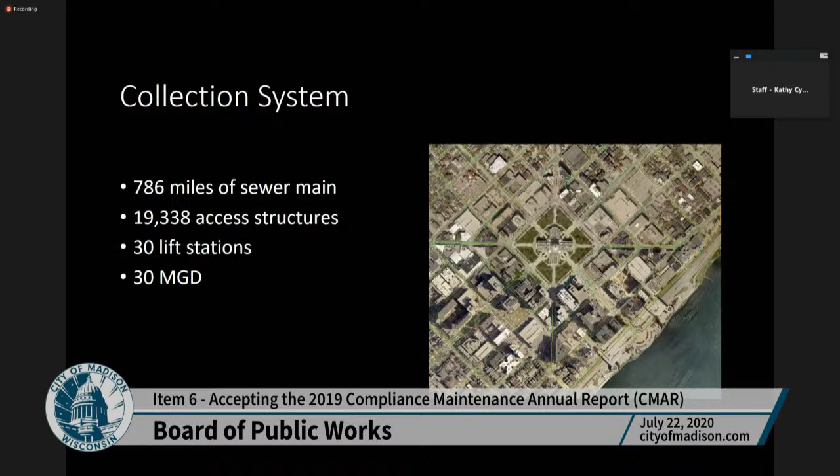The city's collection system consists of 786 miles of sanitary sewer main connected by over 19,000 access structures and 30 lift stations. Every day we convey 30 million gallons of wastewater to the Nine Springs wastewater treatment plant from our residents and businesses. A little bit about the makeup of the pipes in the system.

Sanitary sewer pipes have an estimated useful life of 100 years. You can see that 61% of our system is 50 years or younger, and only 2% of our system has exceeded its theoretical life. That's what we refer to as our infrastructure deficit.

The majority of the pipe at this point in time is plastic. This mirrors the age of the pipes. In 1983 and forward, most pipes were constructed of plastic materials, PVC, and in some cases HDPE. Prior to that, they were predominantly clay or vitrified clay pipe.

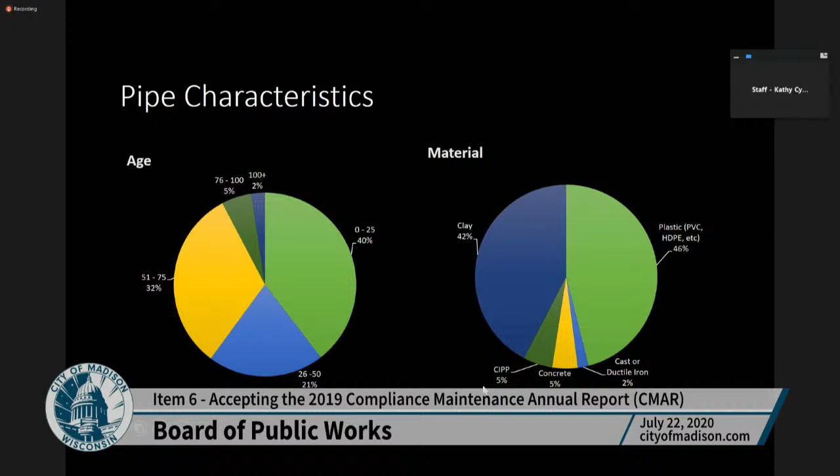This is the percentage of our pipe that's been rehabbed through our trenchless cured-in-place program, about 5% of the system. That program has really allowed us to move forward with meeting our target of 1% a year of total main reconstruction and rehab. It's a trenchless method, can't be used in all instances, but where it can, we can do a lot more footage per year at a lot lower cost, without just digging, so we don't disrupt or cause inconvenience to our residents and businesses.

Our preventative maintenance program plays a significant role in how well our system functions. We have a pretty aggressive program that calls for every pipe in the system being cleaned on a scheduled basis, a minimum of once every 3 years. Some pipes are cleaned more frequently based on different characteristics: age, whether they're a little flatter, whether they're 6-inch mains, whether they have a history of root problems, or whether they're connected to businesses that produce grease, that sort of thing.

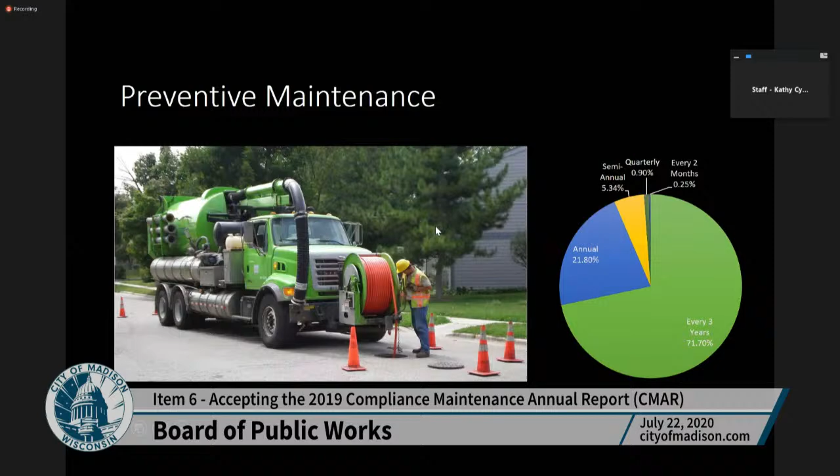Over the years, we have significantly reduced our sanitary sewer main backups to the point where we're consistently under 50 since 2005, which was the last time we exceeded 50 sewer main backups. In the early to mid-90s, we were pushing 400. Last year, we were at 7.

So, post sewer backup, I just want you to be aware that even though we don't have a lot of sewer backups and sanitary sewer overflows, when we do, we have a process in place to assure they don't repeat themselves. Within 24 hours, we televise the sewer that backed up to determine what caused the issue. We then either make repairs, perform increased cleaning, or recommend those lines for reconstruction or rehab by our engineering staff. So that's all I have.

Do you have any questions?

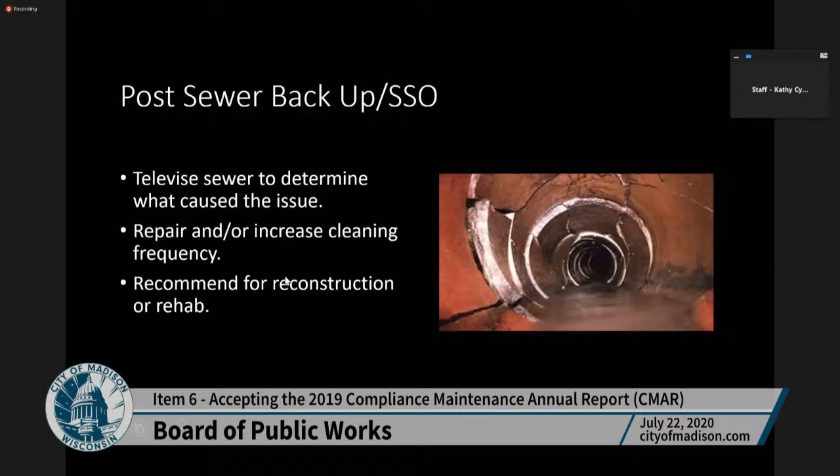Do we have any questions from the board? I've got a question, Kathy. Okay.

It looks like the electrical usage goes up in December and January. Is that because of electrical heaters, or what's the reason for that? Do you know? I don't have a good answer for you, but I can find out and get back to you.

And then the second question that I had, you got average daily flow down as roughly 30 million gallons a day. Correct. Do you have the data for peak monthly and peak hourly flows? No, we get that data from the sewage district, and they don't have that data available to us broken down by the individual communities that they serve.

But don't you need that data to make a determination if you've got excessive infiltration? We know when MMSD monitors and maintains our sewer lift stations, which we have 30 of those, and they do let us know when we have excessive pump run times.

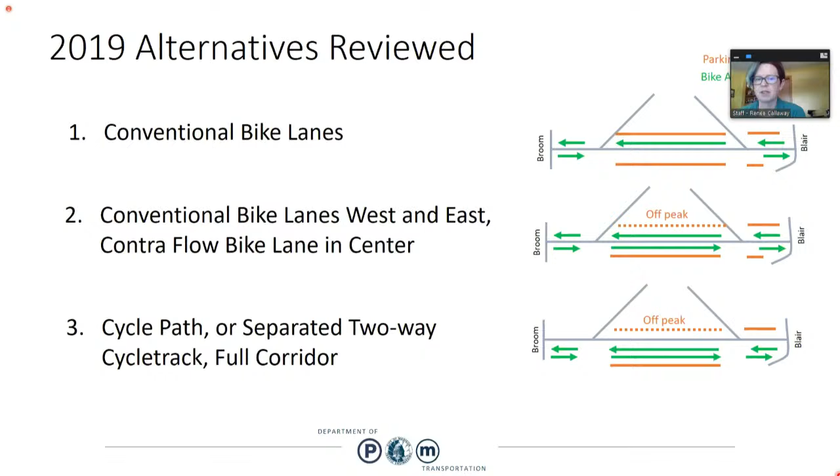Then we looked at what is called a cycle path, a separated two-way cycle track, for the full corridor, so you would be able to travel two-way in a space separated from motor vehicles. If you go to the next slide, that's what we are going to talk about tonight and what we're recommending for this alternative, and we will have more slides showing how that will work.

We really came up with this because there are a lot of safety benefits. It definitely increases usage, particularly by less confident cyclists. It's a very clear space, not on the sidewalk for cyclists. It takes up a lot less space to do a two-way cycle track versus two one-ways. It also allows for passing and can improve connectivity. Obviously, it's better for access on one side of the street versus the other. We do have to give careful thought to the design of loading areas, particularly for people with disabilities—it has to be a very clear design so everyone knows where people walk, bike, drive, and park.

And it can have some negatives in terms of being less efficient for cyclists. You do have some challenges in ensuring that everyone is aware it's a two-way facility in that one-way area, particularly where you wouldn't expect that kind of travel.

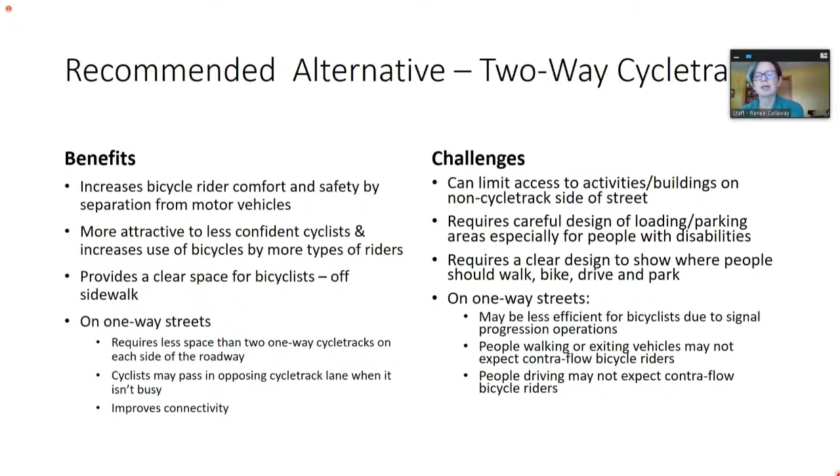But there are many benefits. There was a big study of one in Brooklyn showing that crashes went down, speeding actually went down, and sidewalk riding was reduced to almost nothing. Traffic volumes and travel times stayed very much the same. A lot more people were biking there, and during that initial study, there were no pedestrian injuries. Portland did some research finding that these routes are more popular—people are more likely to choose that route than ones that are not cycle tracks.

And the design, as I mentioned, we met with that organization, NACTO, because the designs have been changing. There's a lot more thought going into them, and we wanted to make sure we were following the most current best practices in the designs we're looking at.

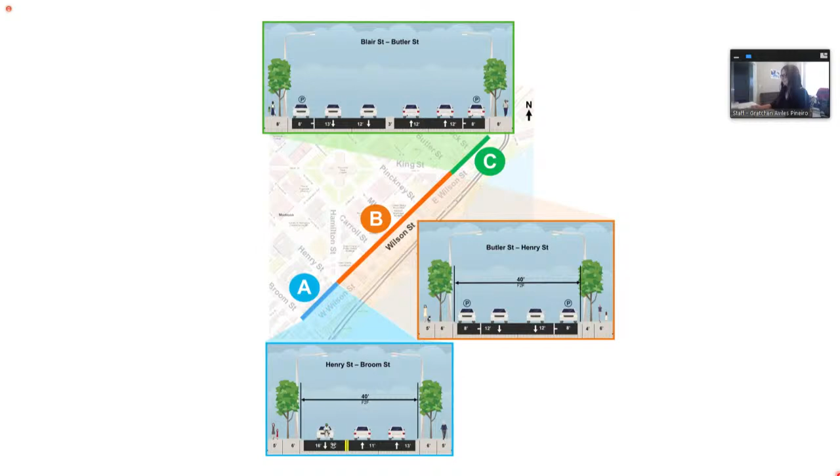Thank you, I couldn't unmute myself. So I will go through what the cycle track would look like on the different sections of Wilson Street. We will start with Wilson Street between Broom and Henry. If we stand on Wilson Street and look east towards Blair Street, this is how the street would look.

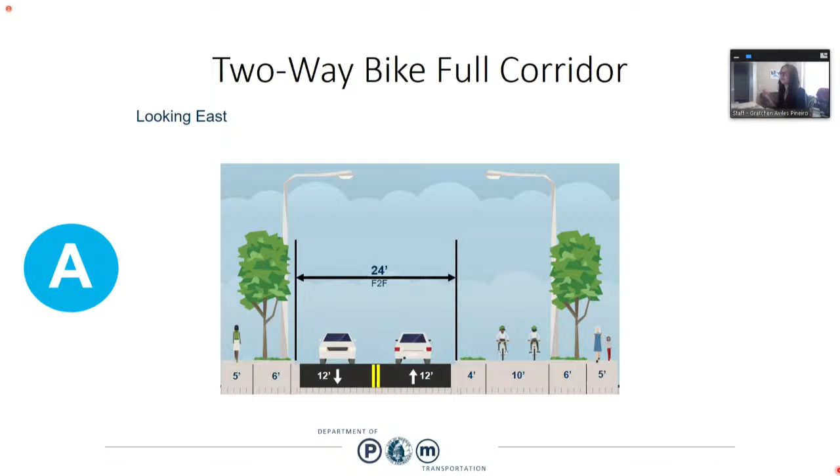We have one travel lane each direction, and to the right, south of Wilson Street, is where the cycle track would be located. The cycle track in this section is going to be off-street, at the same level as the sidewalk, but separated from the sidewalk by the terrace.

This is a plan view of that 300 block of West Wilson. On the left is Broom Street, and to the right is the intersection of Henry and Hamilton. Highlighted in green is the cycle track, and then we see one travel lane each direction. As we approach the intersection of Henry and Hamilton, we have two left turning lanes to accommodate the volumes turning onto Henry and Hamilton.

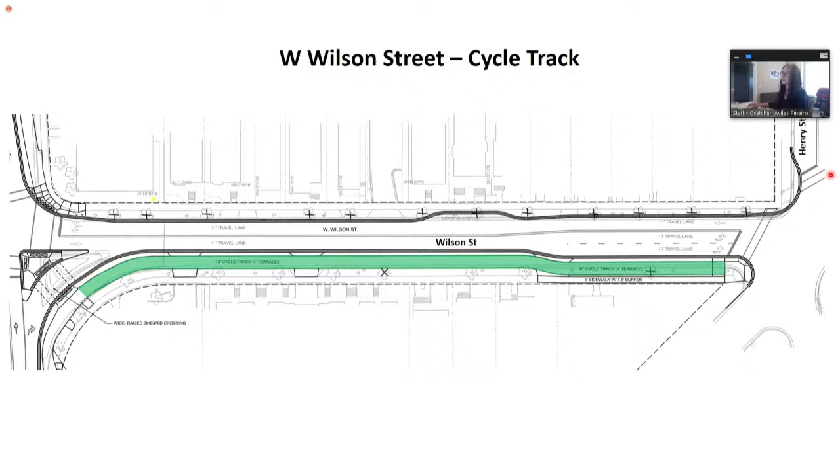Moving east, the next section is between Henry and Butler. This section, the cycle track is also located on the south side, but on street, so it'll be at the same level as vehicles. We have the cycle track followed by a 2-foot buffer, a loading and parking lane, a travel lane, and then a lane on the left or north side of Wilson Street, which will be a parking lane during off-peak hours but a travel lane during peak hours.

So during the morning and afternoon peak hours, this section of Wilson Street will have two travel lanes, and whenever it's an off-peak time, it'll have parking on both sides.

After meeting with NACTO, they suggested that at locations where we are expecting larger vehicles for loading, we narrow the width of the cycle track. Here we have 9 feet instead of 10, and make the buffer wider for that transition zone between the loading lane and the cycle track.

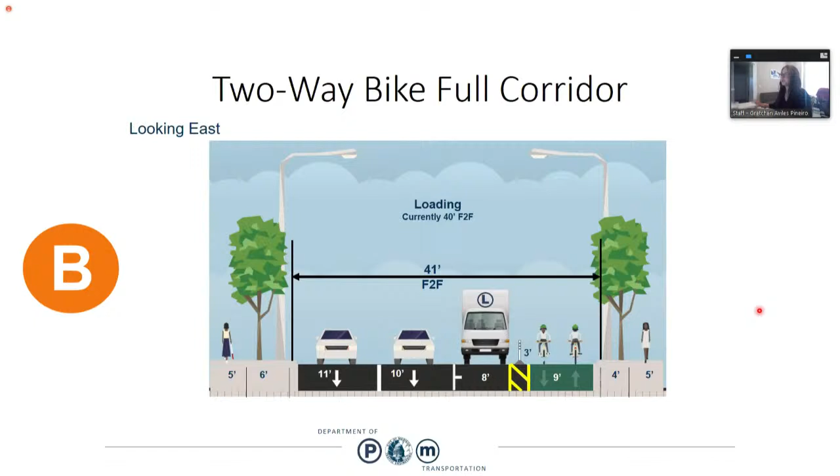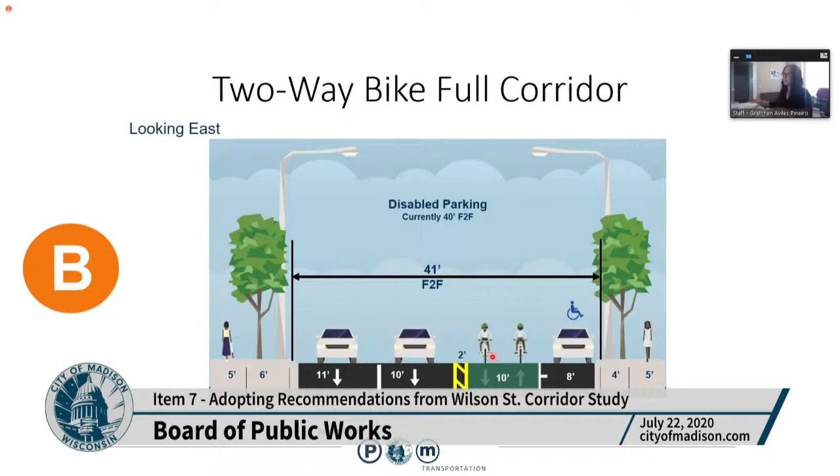The cycle track is going to be located to the south, next to the curb, for the majority of the block, except where we have disabled parking. For vehicles to be able to load and unload passengers, they need to be next to the curb. So in any locations where we have disabled parking, the cycle track will shift left or north about 8 feet to provide that space for the disabled parking.

The next section is Wilson Street between Butler and Blair. In this section, we currently have parking on both sides. After doing a parking occupancy study, the parking on the south side of this section had the lowest occupancy for the entire corridor. So the proposal is to remove the parking on the south side to provide enough room for a 2-way cycle track on street and a 3-foot buffer.

As we approach the intersection with Blair and John Nolen, the on-street cycle track would go off-street right about the intersection of Franklin Street, and continue off-street, separate from the sidewalk. So we would have a 5-foot sidewalk and a 10-foot cycle track, and they will approach the intersection and cross at the same time as pedestrians, to the east side of John Nolen, which has a separate sidewalk and path.

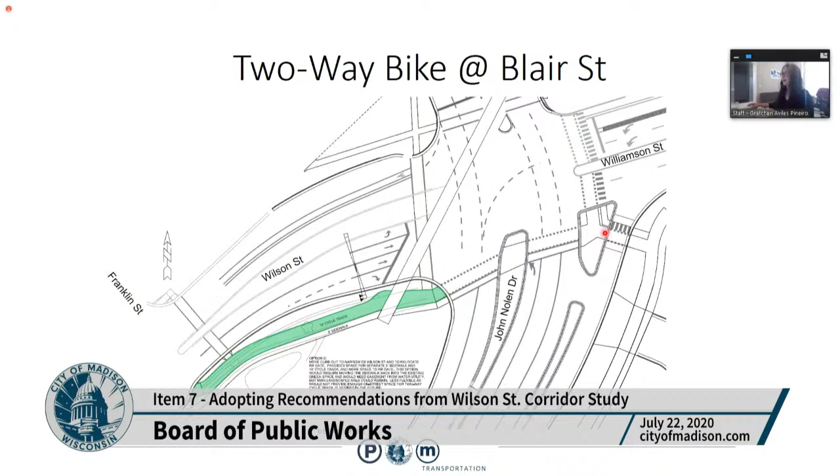As part of our corridor study, we have Broom Street between Main and John Nolen. Between Main Street and Doty Street, we have an on-street protected two-way cycle track and a floating bus stop to accommodate the existing bus stop currently located in this block. To make this floating bus stop accessible to all users, we have a crossing that's raised throughout, from the sidewalk across the terrace and across the cycle track.

Next is Doty Street, on Broom Street between Doty and Wilson. Here we have an off-street two-way cycle track, very similar to what we have on the 300 block of Wilson Street, a cycle track separate from the sidewalk. We have one northbound lane on Broom Street; we currently have two, so to provide enough room for a separate cycle track, we are reducing the northbound lanes from 2 to 1 on this block.

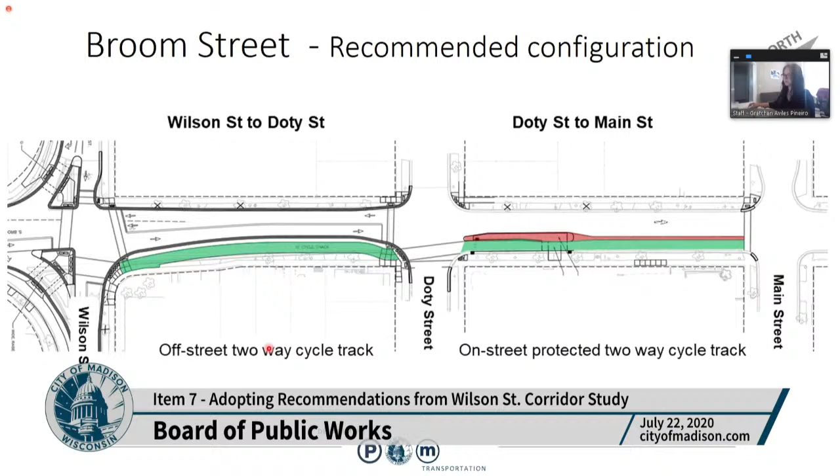And this is how the intersection of Wilson and Broom would look like. We have the channelized right turns with raised crossings to reduce the speed of vehicles and increase safety for pedestrians, making them more visible to the high right turning movements, especially the northbound right turn in the mornings.

And we have shorter signalized ped and bike crossings. So with these two islands right here, we provide a shorter crossing for pedestrians and bikes that are going to be signalized, for the east, west, and south leg.

Also, with the location of this island right here, since we had to remove one northbound lane and we have two lanes on the south side of Broom going northbound, we can only have one lane feeding that receiving lane on the north side of the intersection. So the rightmost lane is going to be a right turn only.

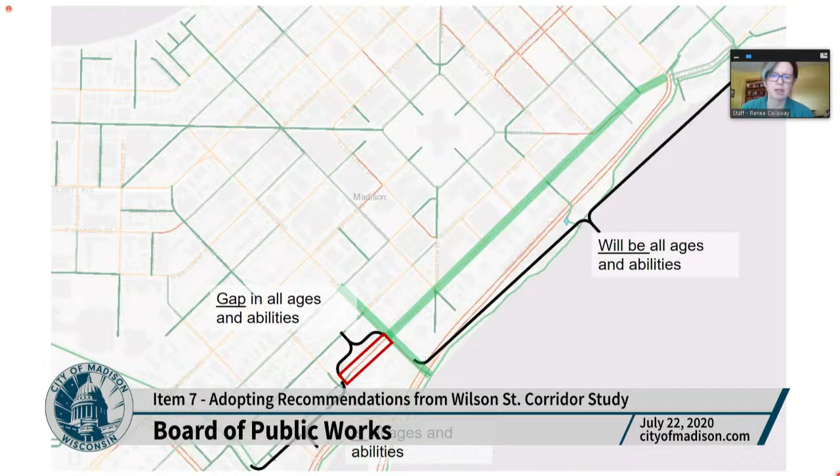Okay, do we have any questions?

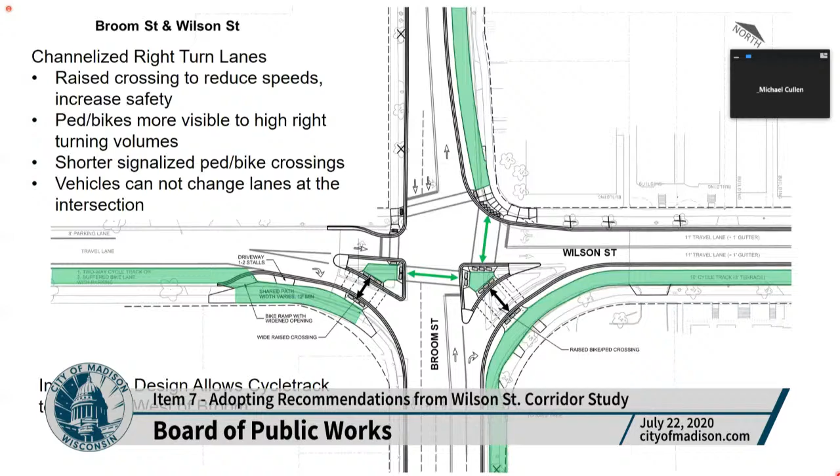I had one question on the Broom Street portion of the project where you've got to relocate the utilities. Is that going to put the utilities right at the street? No, so we would be making the sidewalk wider to make that a shared use path, and then we will also have some terrace space, about 3.5 feet, and that's where the utilities would be relocated to.

Okay. All right, good. No, looks very good. Any other questions?

Do I have a motion for approval? David? So moved. Do I have a second? Second. Got a motion with a second. Unless I see any objections, the motion will be approved unanimously. Seeing none, so moved, so approved.

All righty, thank you very much. Thank you, Gretchen and Renee.

Agenda number 9, relocation order for land interest. So we've got Sally Swenson. And I see Janet is here, and I believe she'll be taking this item. Okay.

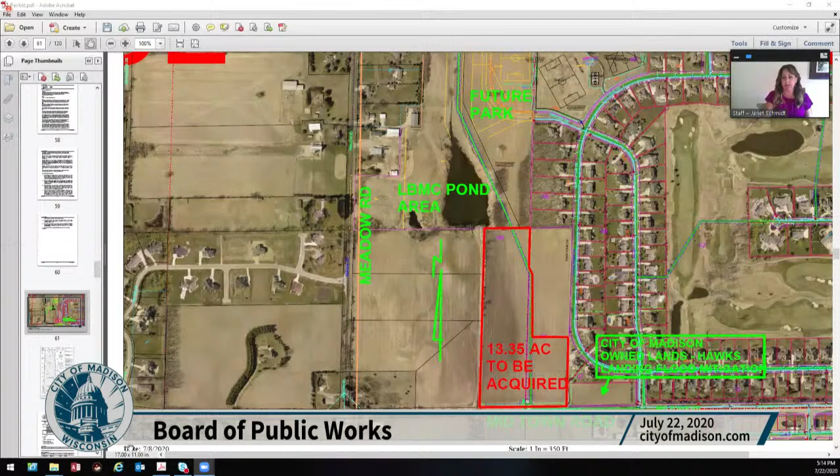I'll explain the map a little bit. Currently, directly to the west of that, there's a piece with an arrow right above the word Road in Midtown Road, which we recently acquired from the Dreger family as well. So this is going to be a continuation of land acquisition in this area for flood mitigation efforts, as indicated in our Lower Badger Mill Creek Impact Fee District and shown in the Pioneer Neighborhood Development Plan.

The goal for the project - and you'll be seeing this later, Sally is going to be the project engineer for the pond project - is to build large regional stormwater facilities just north of this area we're acquiring. That's going to be a large pond stretching south through the property to be acquired, eventually discharging out to Midtown Road. This is all kind of in conjunction with a future park expansion for Hill Creek Park, which is totally separate from our project but will be done alongside it.

Engineering staff met with the Dreger family, and they've been very willing to sell this property to us. We worked with them to allow for some developable land. They realized the area we're looking to acquire is very low and is going to be subject to flooding in the future as the lands develop. Actually, it does have some issues right now.

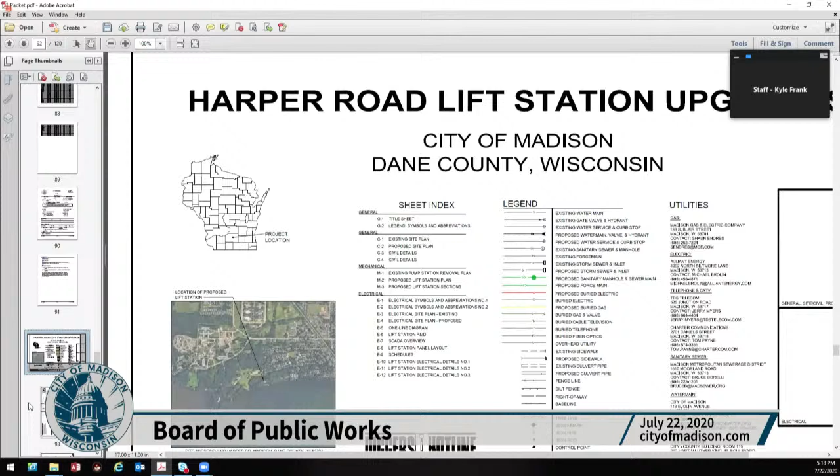The project itself is the replacement of the current lift station out at 3402 Harper Road, basically at the intersection of Harper Road and Woodward on the north side of Madison, right near the shores of Lake Mendota. You can see the picture in the lower left of the sheet showing what the existing station looks like now. There's a building with a dry well, which holds two pot pumps, and the engines and electrical are housed within the building.

These pot pumps are getting extremely old, and the ability to maintain them is becoming extremely difficult. So it was determined that it was time to look into replacing them with something more modern and upgrading all of the utilities, controls, and telemetry, as well as providing an emergency generator for the site, which there currently is not one. We put the design out for proposal, and we've been going through the design process over the last couple of months to get to the layout you see in front of you.

The station itself would be located to the north, along Harper Road there. It would not have a building, which is currently shown.

It would be an on-grade concrete pad with an on-grade lift station lid. The control panel would be located to the east of the station, fully upgraded with all new electrical panels and other equipment. It'll be all new plumbing, all new pumps, and the current design is to use a prefabricated lift station.

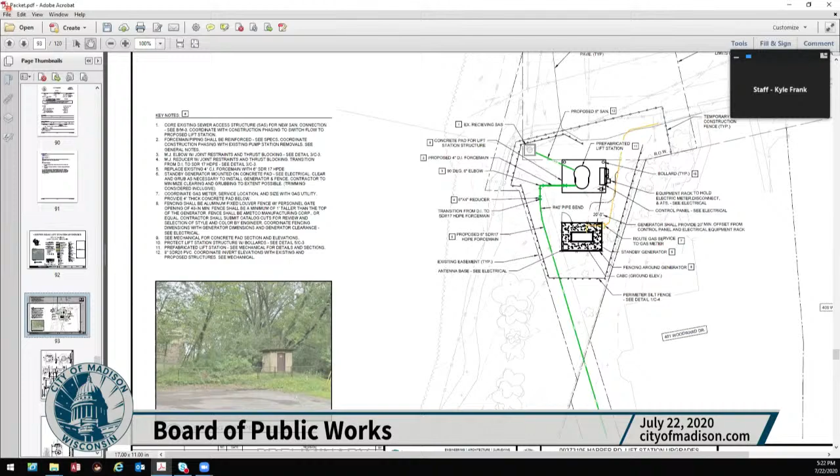As far as retrieving the pumps, is that with a winch or a crane of some sort? It's actually on a rail system. If you scroll down, we've got the layout of the new one. Let's see, I think it's the next one up, sheet 93 or 94 maybe. Nope, that's the old one, sorry. It was the next one down. One more.

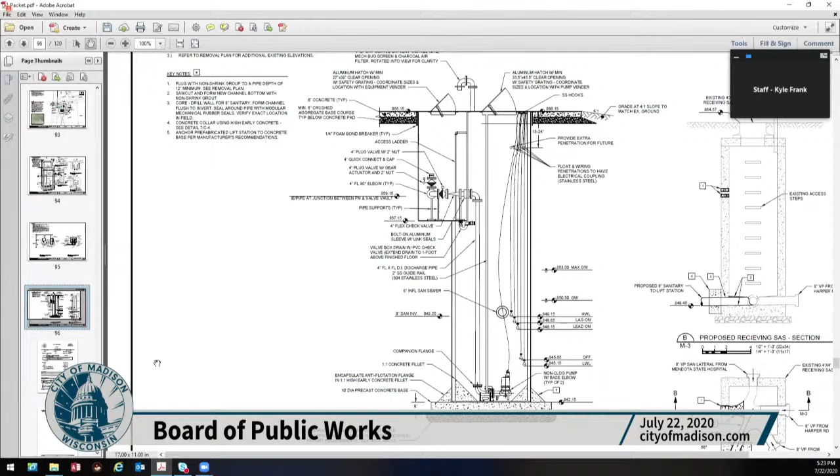So here's the actual cross-section of it. They're on rails, and there's a quick disconnect valve that disconnects whenever you lift it. They are on essentially chains in a rail system that gets lifted up.

So would you be backing up a truck with a small crane on it, or something? Yep, yep, so MMSD actually maintains all of our stations, so they do have trucks that have lift cranes on them.

Just out of curiosity, what was the date the existing pump station was installed? I guess I'm curious how it was installed without having an easement. It was installed in 1962. I don't know if it's very close to the property line, or if that line has changed since then, or if the survey was off by that much, but 1962 was when the original was installed.

Gotcha. Okay, any other questions?

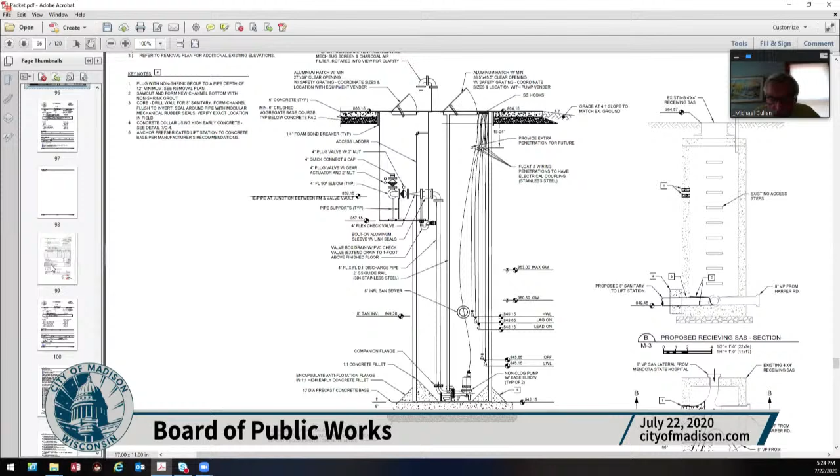Okay, this is just an oversight. The designer missed the caulking in the bid, so that price was negotiated with the contractor, and you'll see that $6,890 for caulk in the expansion joints and along buildings and such.

Is there a reason why we're paying for this, Rob? We designed it. Right, but you said the contractor missed it? No, the designer missed it. Oh, I see. Okay. Yeah. I must have misheard you.

Any other questions? Seeing none, do we have a motion for approval? Alder Evers? Move to approve. Do I have a second? Joe? Second? Got a motion with a second. This will be approved unanimously unless I see any objections. Seeing none, approved. Great.